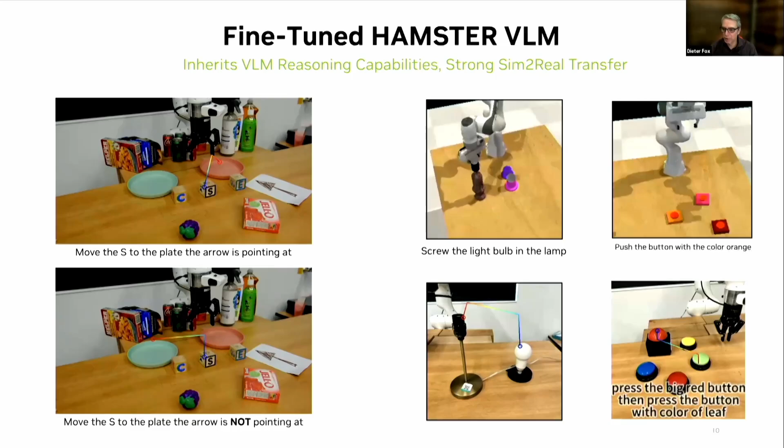Here, let me give you another example. There's the push button task, which is also only in the RL bench data set in simulation. And the model is able to correctly interpret this task here, where it has to identify which of the two red buttons is the big one.

And interestingly also, for example, in the training data, these buttons were only identified by colors like red, blue, and green, but it can transfer that even if, for example, the green button is identified through the color of leaf. So these are all kind of these transfers and generalizations that we're getting automatically by fine-tuning a very capable vision language model.

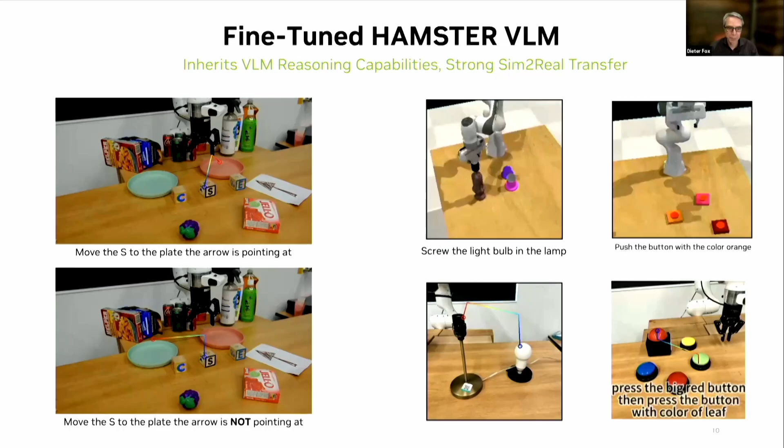So now that we have the high-level model trained, the next question is on the low-level model: how do we train the 3D policy? In this case, we actually tried out two different low-level policies: RVT2 and 3D diffuser actor. We could also use other diffusion policies, but these are the two we tried in the HAMSTER model here.

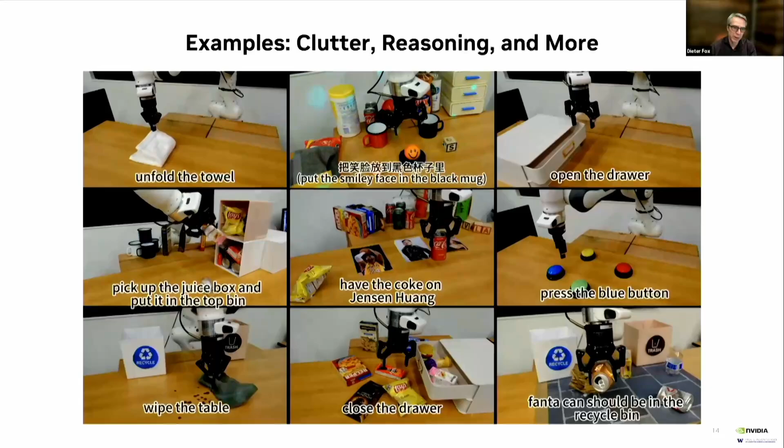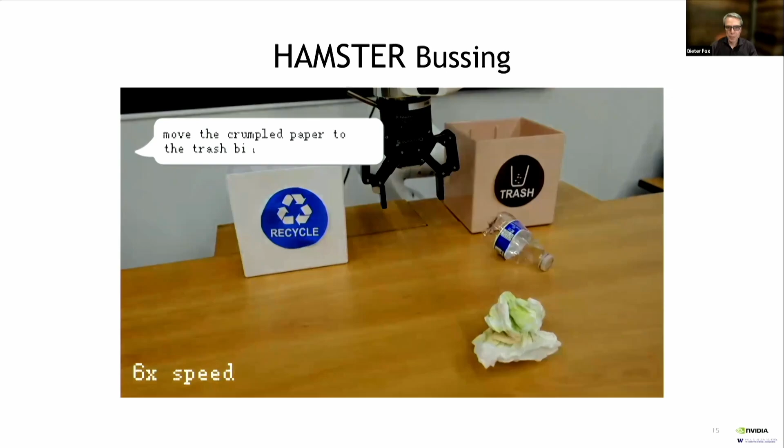Here's another very quick last example. We can also have a kind of conversation with the model, and then pick up a crushed can, put it somewhere, and we can do this kind of task with the trained model, leveraging both the semantic reasoning, open world power from the VLA, and also the 3D motion policies that we train. So with that, I want to summarize.

I think it's fair to say that these VLMs are becoming more and more powerful on open world reasoning, but also on fine-grained visual tasks. With just a little bit of fine-tuning on more manipulation relevant outputs, in this case 2D visual trajectories, we can generate VLAs that have very strong semantic and spatial understanding of manipulation tasks.

We're getting very good sim-to-real transfer at that level. But at the same time, these VLAs are not quite high frequency enough and not reactive enough to be deployed in robot manipulation settings. They're also not precise enough for the 3D motion that we need for robot manipulation, and for more higher dimensional dexterous manipulation tasks. That is where these hierarchical VLAs come in.

I think hierarchical VLAs leverage the capabilities both of the open world reasoning and reactive motion generation that you get from these lower level policies. Moving forward, I think the key open step is really on improving the lower level motion policies. These VLAs on the high level reasoning are already extremely powerful, and we're going to see more progress. But I think where we really have to move more is to train lower level policies on far more data, as we're seeing, for example, by Physical Intelligence and other companies, so that we get more robust 3D policies.

Clearly we've all understood that there's an explosion in interest and work going on in robotics today. Many years ago we just wanted to move from A to B. Now we're talking about generalist robots that will go into my home, your home, and perform interesting tasks. This growth is trailing a bit, but I think it's also inspired by the successes happening in AI broadly, but more specifically generative AI.

As you've heard today, we have amazing efforts in the community to collect data for training models. We've all understood it's different to train a model for a robot versus a language model. I'm referring to the Droid dataset, for example, the OpenX Embodiment. These are amazing efforts by the community to collect data.

Also, let me point out the use of simulation. Simulators are becoming much more powerful than they used to be, and they're closing the sim-to-real gap. I've also seen a lot of work on blending physical data collection and simulation. So it's very interesting what's going on.

And there are many new companies and research institutes working on this topic. I think we have to pay attention and understand the capabilities and limitations of this work. But definitely you'll agree with me that it's a lot of effort, a lot of compute, a lot of money, and a lot of time going into this effort.

So what I want to do is bring your attention to some other issues that I believe are very important for making progress and having robots capable of helping us and augmenting our capabilities. I want to talk about the power of having robust core operations. For me, a core operation is motion planning.

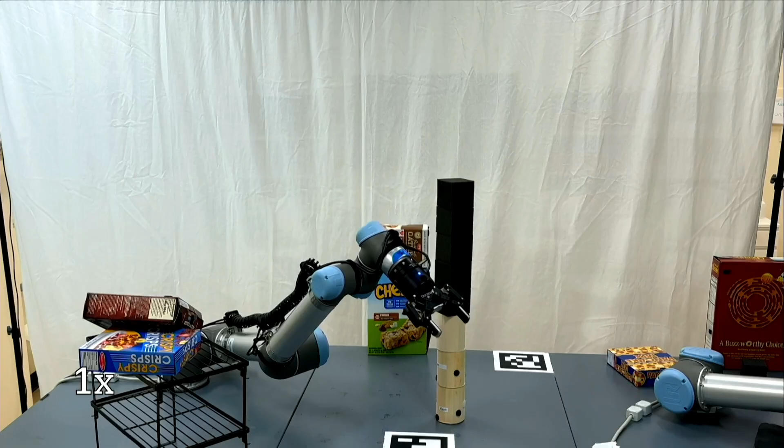So let's start with motion planning. Where are we today? In my lab, with some recent developments, we can do online motion planning for the robot you see here in a dynamic environment in milliseconds, on a commercial CPU, not a GPU. So we're providing this capability for a dynamic environment for any robot in any reasonable environment. Think about it, milliseconds.

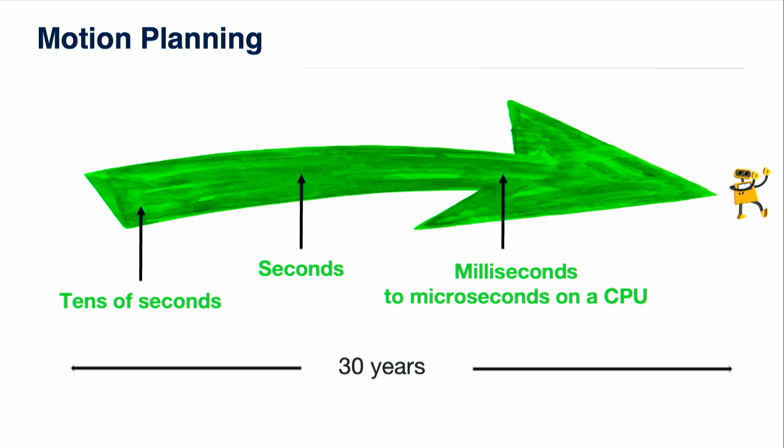This did not come immediately, okay? This is the result of work that's been going on for many, many years. We started with tens of seconds, and now we're down to milliseconds and microseconds, as I will show you.

The work I'm describing here is based on a technique called sampling-based motion planning. There are many sampling-based motion planners; this work started around 94, 96. I won't describe these planners here, but I'll say they sample the space somehow and create a structure, either a roadmap or a tree, that they use for motion planning. You can read one of the 200-plus papers that exist on different versions of these sampling-based motion planners.

Or you can use our OMPL, our Open Motion Planning Library. This is a library my group has been supporting for many, many years now. We have about 4,000 users, 40 planners, 81 contributors. This is really a resource for the community.

Last year, we showed how to take all these planners, the sampling-based motion planners, and have them work in microseconds in modeled environments. What is happening here is that we can use a kind of parallelization called single-instruction multiple data parallelism, and achieve kilohertz planning time speeds. SIMD allows us to unlock several algorithmic improvements in the core operations of sampling-based motion planners. These are forward kinematics and collision checking.

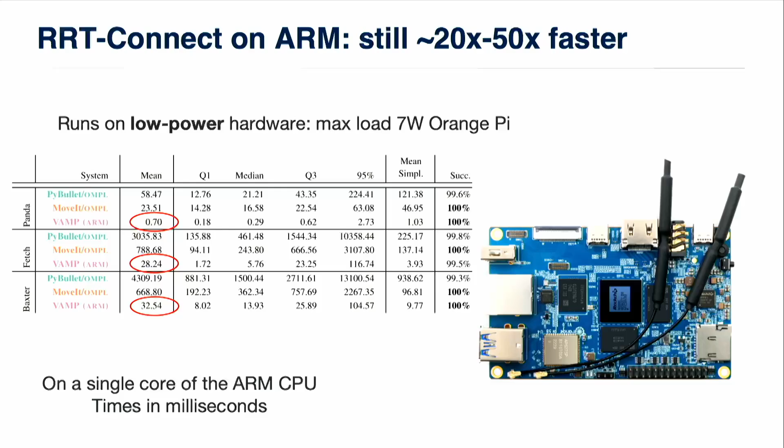Now, what happens with dynamic environments? We can achieve this planning time, it works, but you have to be careful how you implement things. What you are seeing here is a camera. We have a camera on top of this workspace, and you see the point cloud that we get from this camera. We receive a point cloud, we rebuild the scene representation, and we plan.

In order to do this, we have to use SIMD parallelism, and we had to invent new techniques and new data structures, in particular the collision-affording point trees. They allow us to do nanosecond collision checking, which enables us to plan in milliseconds in the environments that you see here. So this kind of operation is becoming very, very reliable and very, very fast and very, very cheap.

This is what I mean by paying attention to operations that we use all the time in robotics: make them really good and get them out of the way, try to understand how to put everything else together. And everything else, as you saw, is already a lot.

So the second thing that I want to talk about is the power of abstraction, modularity, and composition for long-horizon planning. This is something that is not discussed a lot recently, but in my opinion is very important. I'll show you an example.

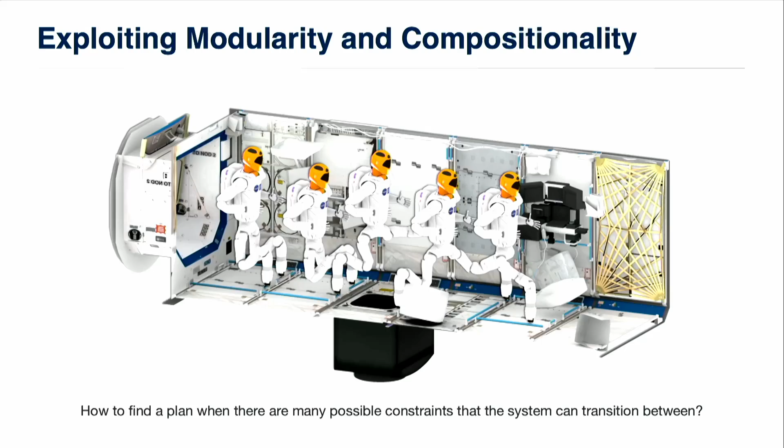I will use the R2 robot of NASA. This is a robot that NASA designed for the space station. It needs to go from one end of the capsule to the other end. It always needs to hold on a handrail, otherwise this robot will float in space, and this is not something that we want. So we plan under constraints, but we know how to plan under constraints, and we know how to do that fast and reliably.

So in this example, we plan on this constraint surface that I'm showing in the slide. This means that the robot has one leg tethered to a handrail. When this surface intersects with the pink surface, we know that two different constraints are satisfied on the intersection, and we can move from one constraint to the other, which means the robot can move to a new handrail and release the old one. And this is how we get the motion that you see here.

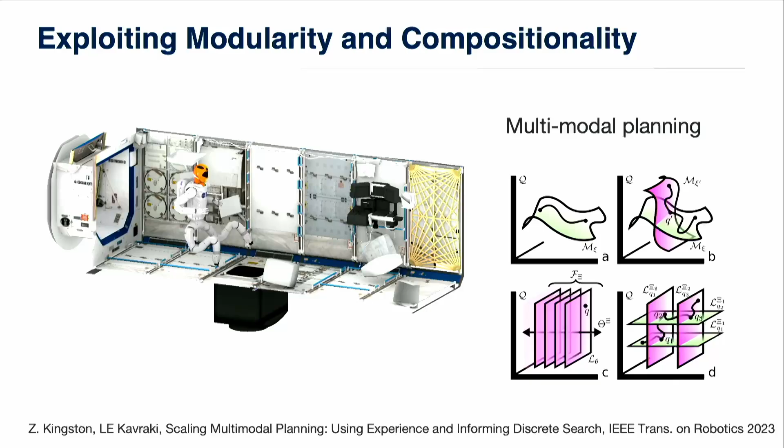There's no learning here, it's not complex, and this is the kind of behavior we are getting, and I can show you many examples. So this is compositionality of very, very simple operations, and it's done on the constraints.

There has been a huge amount of work on long horizon planning, task and motion planning. It did not start with LLMs or VLMs. It started a long time ago, in 1990.

Everybody since then has recognized that there are two very important parts when we talk about task and motion planning: one is the task planning, which is discrete, and the other is the motion planning, which is the continuous part. So we have a lot of things for each of these.

You've seen in the previous talk for task planning, we can use VLMs, LLMs, VLAs. It is, or formal methods, or constraint satisfaction. It's a lot of tools that we have at our disposal, and these tools are becoming better and better. It's amazing, actually, what we can do.

On the other hand, motion planning, I showed you we can have motions that can be computed very reliably, or we can learn skills. Machine learning has shown us how to learn difficult skills for the robot, skills that require some dexterity or have other characteristics that are hard to write down.

The question is, how do you put these two things together? And this is where everybody is stumbling. My opinion here is that you need to think about abstractions.

You have some task, okay, I'm talking about a long horizon task. You need some kind of representation of this task, some kind of diagram that has an abstraction of the task. You also need abstractions for the environment and the robot.

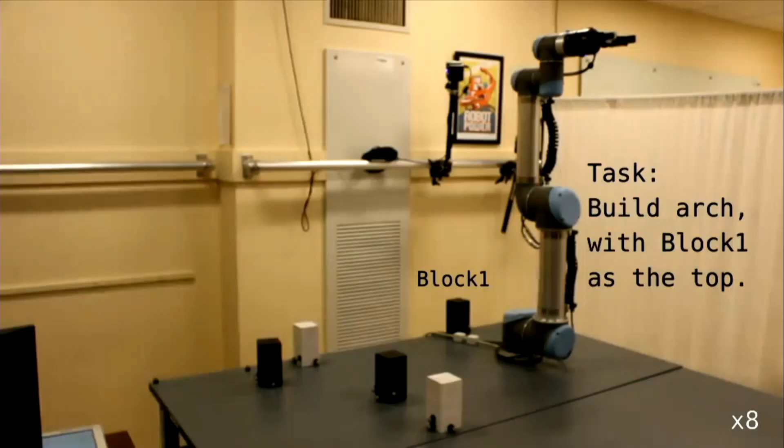Here's a video that I'm going to play, and look at the task. It's a very simple task: we want to build an arch. It has two black blocks as support, two white blocks as support, and it has a black block on the top. So here is the arch completed.

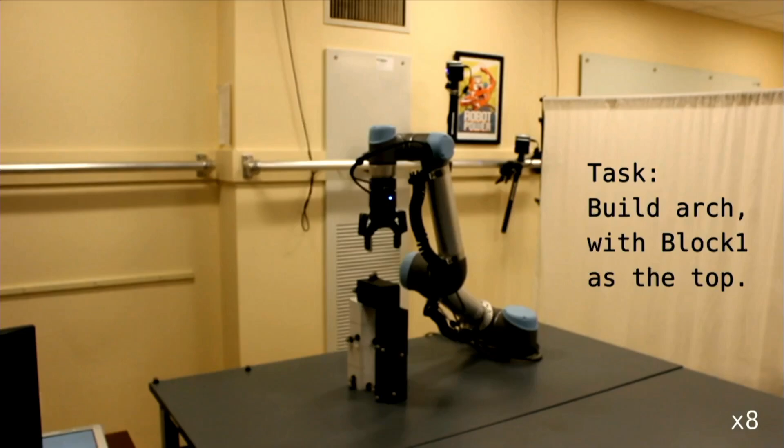What I'm going to do now is replay this video, and I want you to pay attention to the human, okay, not to the task. You will see that first the human...

Okay, let's hope this will start. First the human helps the task by correctly placing the black block. But here, it hurts the task by removing a block that was correctly placed. However, the robot needs to have a strategy, it needs to have enough information to complete the task.

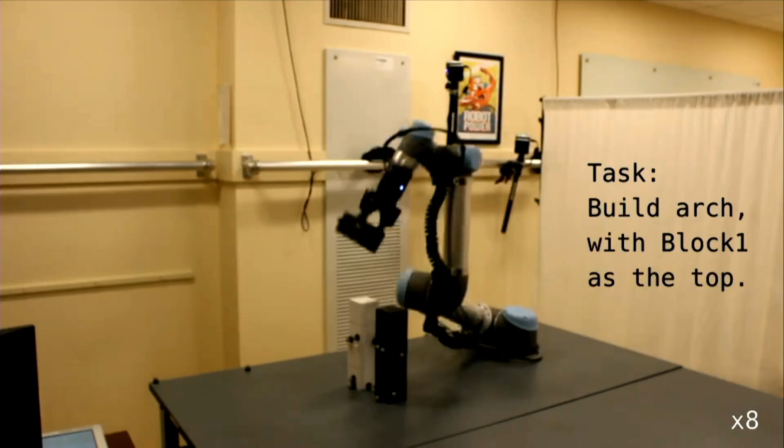And these are things that I believe are totally within our reach. But we need maybe to learn not the motions, but the reactivity of the robot. We can compute it with program synthesis, with constraint satisfactions. We have lots of tools for this. But maybe the human behavior...

How would you deal with an adversarial human? How would you deal with a helpful human? How do you put that in context of the task that you want to solve?

So I'm going to wrap up here by saying that I hope I conveyed to you my belief that we need robust and fast primitives in robotics, and we should continue working on these topics, either by learning or by traditional techniques.

And in the end, systems are both hardware and software, and they need to work together, and we need to display these capabilities for us to be credible.

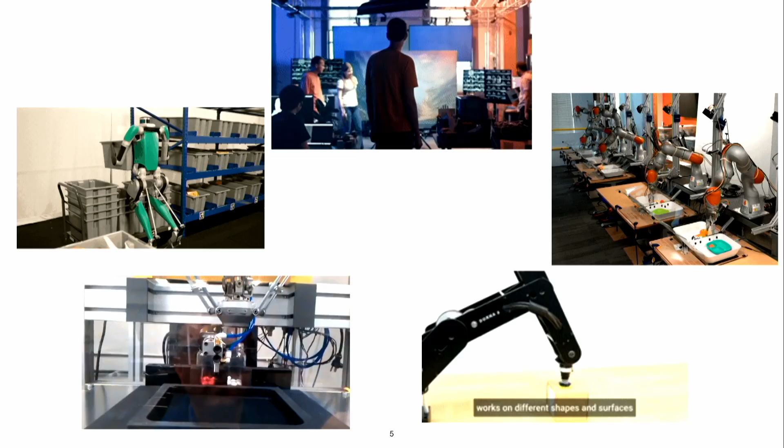So let's jump in. We've heard a lot today about robots that are operating in human spaces and how this would be extremely beneficial if we could actually have them in human spaces doing things that are useful. There's a huge market, a huge need for this. My lab looks at this very holistically. We want robots that can actually assist people. Today I'm going to focus really on the dexterous tasks that you really need for these systems to be effective in human-based environments. So there's been a lot of really cool work over the past few years and decades.

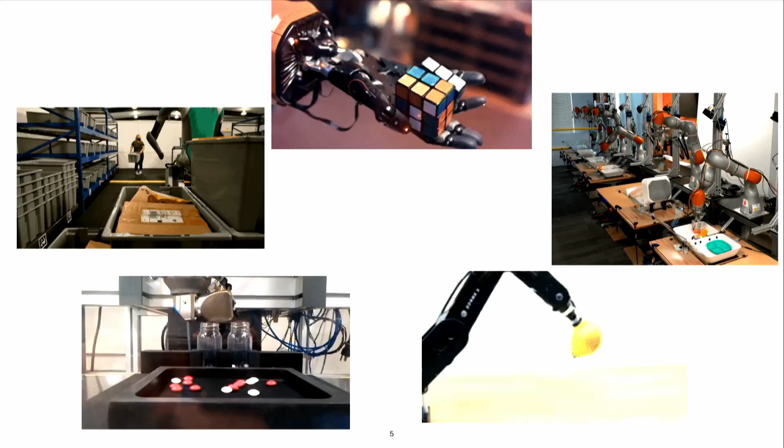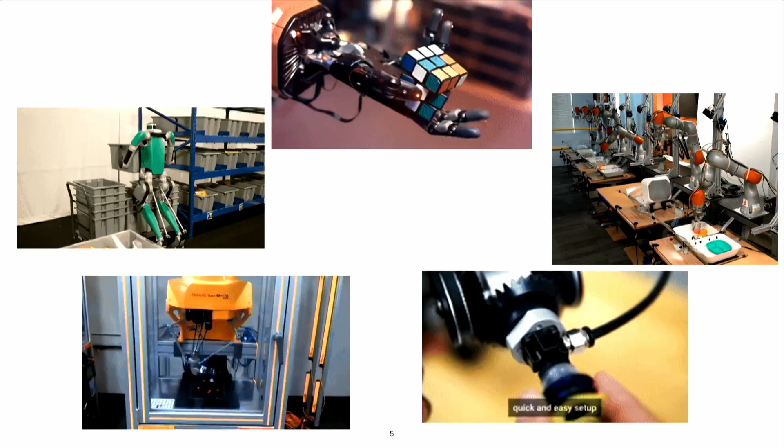But I think one of the key catalyst challenges is having robots that can actually manipulate their environment effectively. In our previous panel, we heard about the Roomba doing amazing things in the home, and then we really had this challenge, and I think it was Charlie that said, if you had a robot that could actually do manipulation, then you have that huge value for those things that you could do in the home. And the question becomes, we have manipulation, but is it good enough, right? We see a lot of these companies that come out and they use a lot of data, they can actually do a lot of cool things, but perhaps some things that we kind of take for granted, like if we want to button up our shirt, is still extremely out of the domain of robots right now.

And why is that? So if I look at some of these videos that I just showed you here, there was challenges and lack of hand articulation. Maybe there's external cameras that need to be involved. Simple pick and place tasks are good, but if there's really dexterity that's required, this is still a really big challenge. And then suction cup is used on the industrial scale, but if whatever you're working with is not flat, hard, rigid, if it's soft and these other issues, you might have trouble.

And also, how long does it take to teach these robots to do these things? If I think about teaching a person how to do these tasks, if they watch me and they feel these things, they're able to pick up really quickly. So why can't we close that gap for robotics?

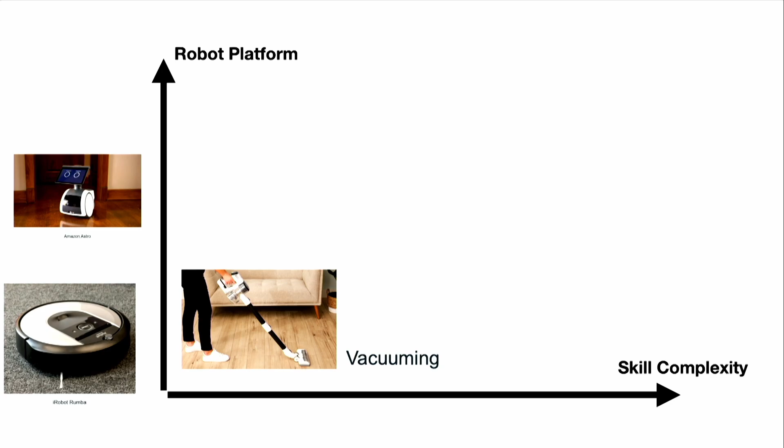And if we think about the robots that we want working around us, the things we need them to do, the Roomba is a great example. You have the vacuuming. You have these social robots that are able to provide communication, home security. But what are we really looking for? I would argue we all recognize, and hence all of the humanoid robots that are coming into existence. If you had a robot that could do all of your chores, could look after an elderly relative, this would be the holy grail.

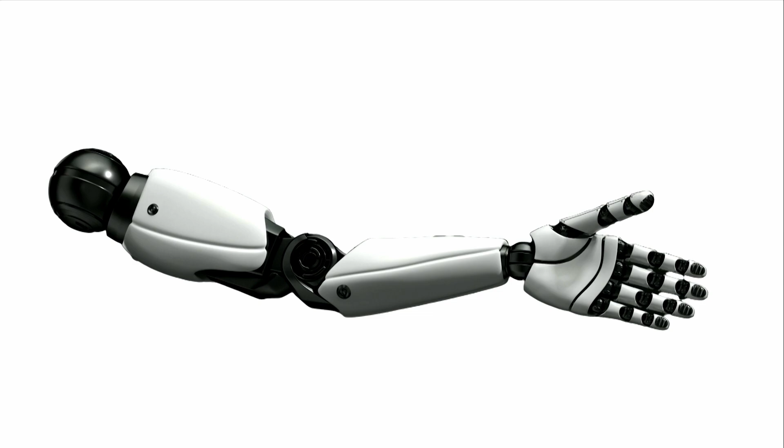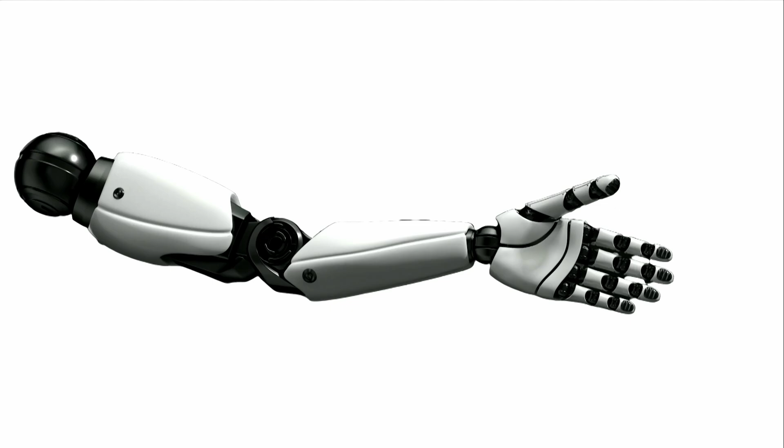So I'm going to jump into quite a few cutting-edge projects that we're doing in the lab. Some of them are published, some will be coming out this month, and really just trying to address this whole problem of manipulation holistically. And so I'll just quickly throw up all my students who work on all of these aspects of the arm and get into what each one of those components include.

So one is the sense of touch. We need robots with a sense of touch that's comparable to what humans can do. If humans are going to teach robots how to do this task, if the robot can feel what the human feels, then you have the opportunity with that data to actually make the same conclusions the human would make with that information.

So I'll talk about our novel optical tactile sensor, DenseTact. I'll talk about induction tactile sensing, which is a new tool we're using in our lab that we think will lend itself to getting more efficient data from a person while still allowing them to have the sense of touch they need to perform a task.

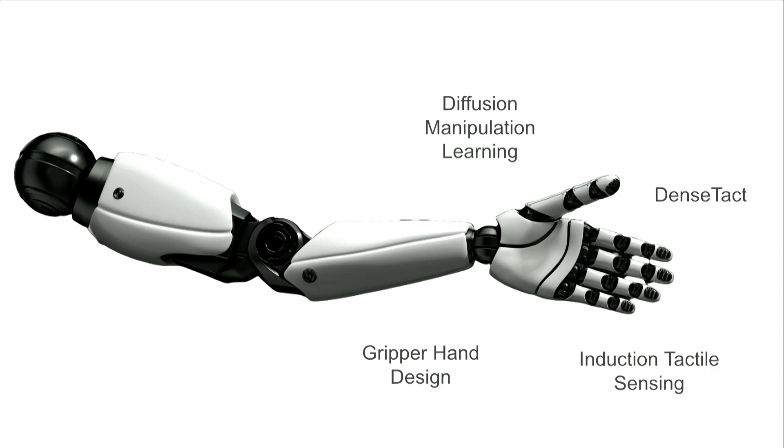I'll talk quickly about our work in gripper hand design, how we can plan for how the hands should move using diffusion. I'll mention some upcoming work in JParse, where we figured out how we could move into and out of singularities with asymptotic stability. This is not damped least squares. This actually gets you to the point, and it helps solve an embodiment problem.

If you want to watch a human demonstrator, you can truly follow their wrist location, their finger location, and I'll show you a video of that. It's a really cool paper coming out shortly. And then I'll talk a little bit about our work applied to teleoperation. Let's go.

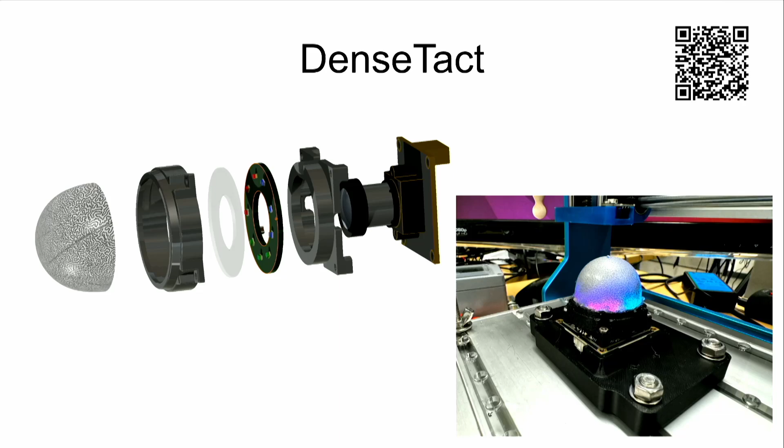So, starting with design, DenseTact is an optical tactile sensor. You have a camera that looks through a translucent silicone gel. It's illuminated by LEDs. When you deform that extremely soft gel, you can actually see the shape and forces of the objects that you're touching.

We use machine learning to take that image and output the shape and net force for that sensor. Right now, our version of our sensor is able to provide you a 6-axis wrench. We're going for a full stress field within the next month.

Here's how we calibrate it. We push it into known indenters. Because we're so soft, we need to know where every position on the sensor is at once. With that information, we can obtain the shape. And in this video, this is how we obtain the forces. We have a net wrench sensor, an ATI sensor below that gets the force and correlates that to the image in our model.

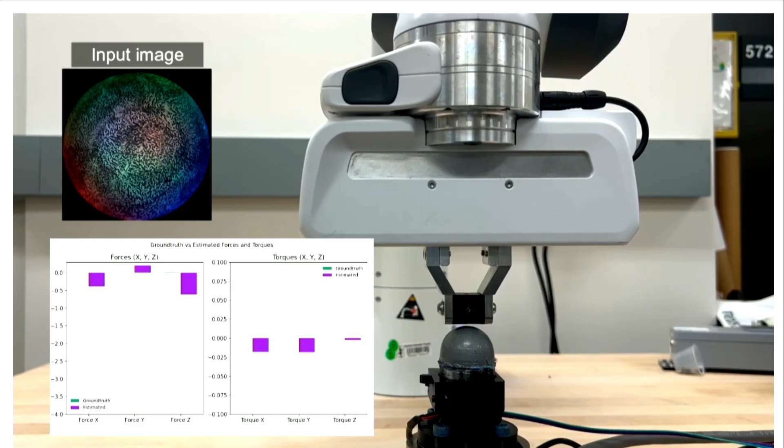This video shows both the ability to detect the 6-axis wrench. The ground truth is shown in green, our sensor measurement in purple. Same model, same setup. We can then use it to collect the high resolution calibrated shape, where for every pixel we have on the order of 0.3 millimeter accuracy per pixel on a megapixel image.

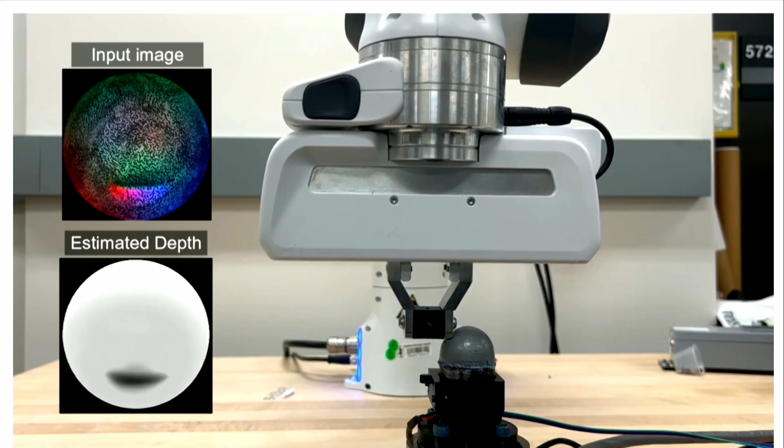What's next? We want to be able to take this information and say, not only can we get high resolution calibrated shape, but what if I could give you the stress field as well at that same resolution and calibrated? If you imagine a person tying a knot, they might need to pull on the different strings and figure out which strings have tension, which ones are loose, and that's how they can actually do that when there's occlusion from vision. Robots could potentially do this too with our type of sensor.

And so this is the high-level method we use to accomplish this. We say, well, we can build a version of our sensor in Abaqus, we can perform these stress measurements, and then we can bring this over with transfer learning to the real world so that we can actually have a calibrated, high-resolution 3D 6-axis wrench sensor over the surface of our sensor in addition to the calibrated shape.

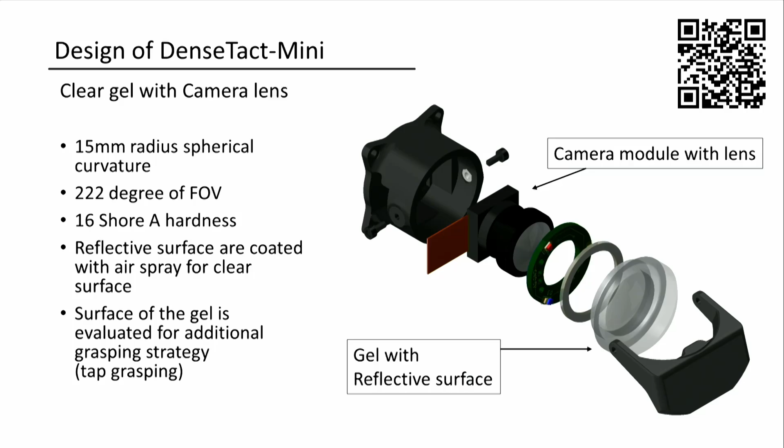We're working to miniaturize this because we're already thinking ahead of what it means for industry to adopt these sensors. If they're too expensive for every finger, that might make adoption more difficult. So we're working to get a version that's under $30, and soon, hopefully, even under $10 per finger.

This is what our current latest DenseTact-Mini looks like. So here you can see our whole sensor. This one is under $40, and most of the cost here is actually in the camera. For a cheaper camera, you can just bring this down.

And so what can you do with this type of sensor? One is a task that is really challenging for vision. What if you wanted to reach into a bowl of screws, figure out which screw you're holding, and classify it?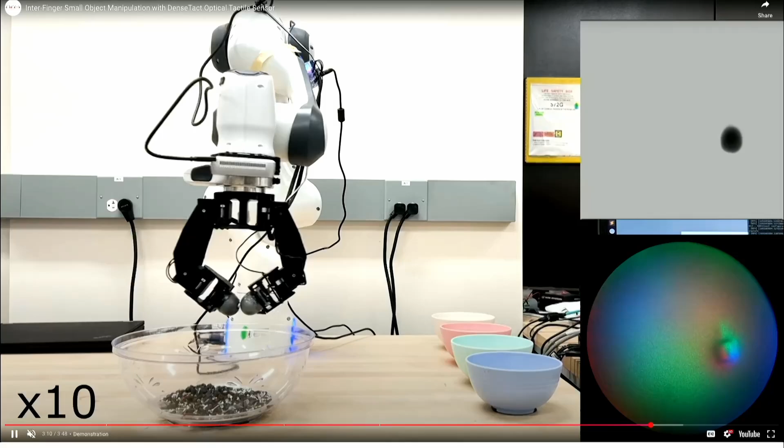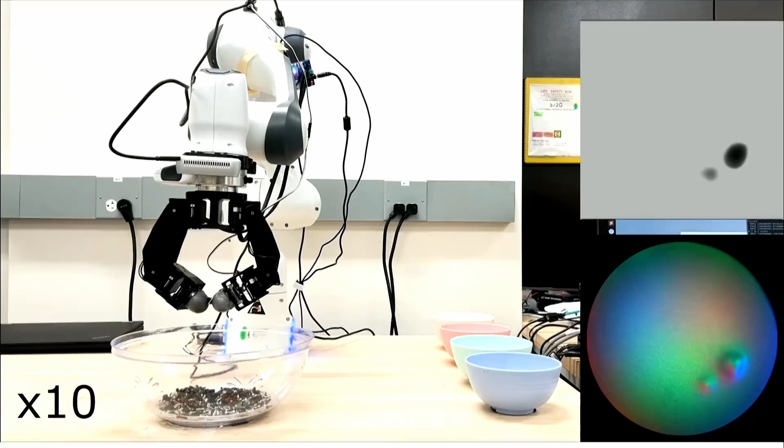If you did this at Home Depot, you'd probably quit your job really quickly. Our robot can do this and save you a lot of pain and suffering. Here you can see the robot reaching in, able to pick, sort, squeeze, and feel which screw is between its finger. If you try this with most other optical tactile sensors, you might struggle to actually feel the shape because they're too rigid. DenseTact being soft can actually deform around the screw and give you that better classification.

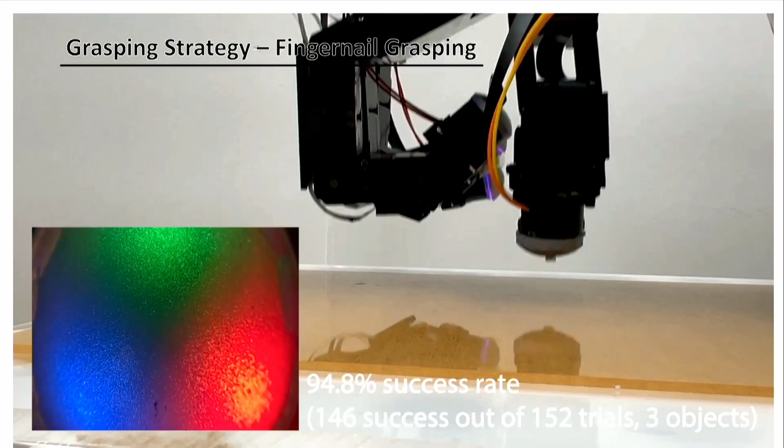For the DenseTact Mini, we realized you could do things like tap grasping. If a person goes to pick up something that's really small, they actually use electrostatic forces to adhere to the object they're working with. We were able to replicate that. We gave ourselves a rudimentary fingernail and could also pick up extremely flat objects, and we're working to integrate that into a more final design. These have great statistical performance in picking these things up successfully.

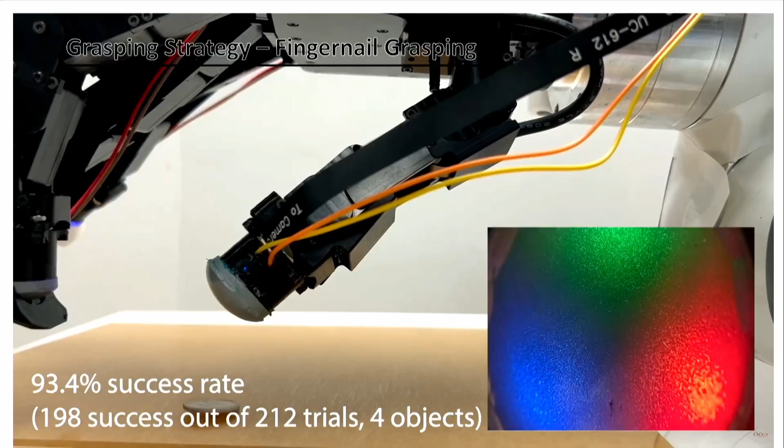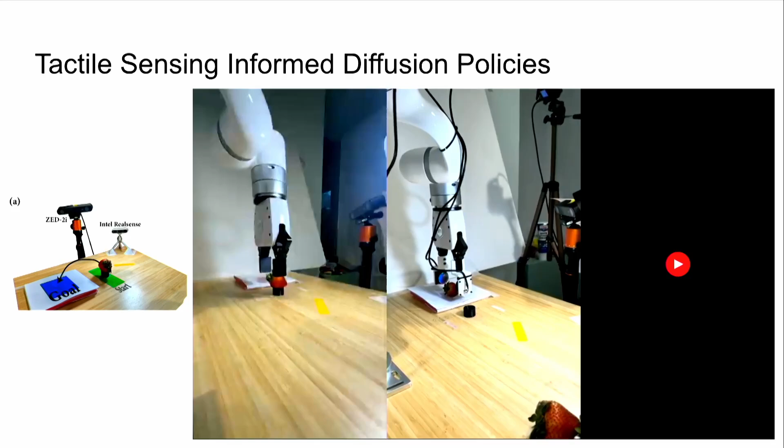Moving to a more practical use case, you can imagine wanting to use these types of grippers in agriculture. So two questions: could you use the sense of touch to determine if you're squeezing too hard? And if you wanted to assess whether or not you were damaging the fruit, how would you effectively do that? To accomplish that, we use DenseTact on our finger and compare this to the damage that would be caused by not using a DenseTact sensor. We're actually able to show that using DenseTact in a diffusion policy, we're able to pick up soft fruits with precision and care.

And how do we assess that damage? We actually use neural radiance fields. We can take a Gaussian splat and scan a strawberry and use this to label areas of damage, which is perhaps a very nice emerging metric for fruit quality observation.

Another use case might be using this to pick up very soft things, like I mentioned before. So what if you wanted to pick up a cloth and figure out how many layers of cloth were between your fingers? You could rub your fingers together and use that friction information to tell you how many layers you were holding, and it turns out this is a very effective method.

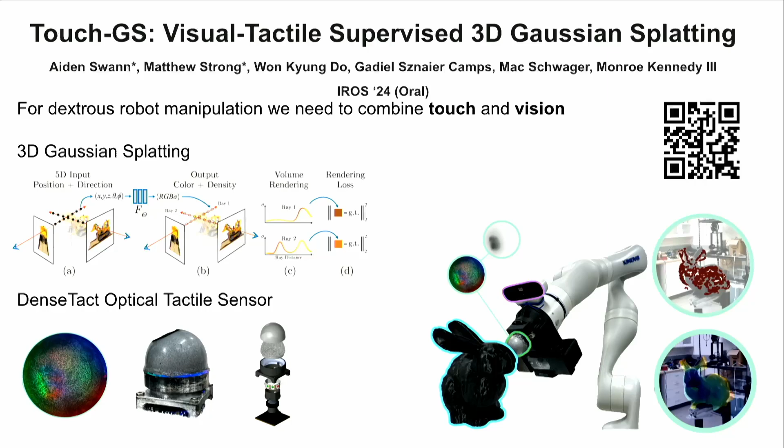What if you wanted to explore an object that might be very dark, transparent, or reflective? You can use the sense of touch combined with vision, so as you touch, you actually build a model of the object you're interacting with. By touching this object many times, we can build a Gaussian splat, a statistical reference of where the surface is, combine this with vision, and this allows us to build hyper-realistic views of the objects we're looking at. Here is a Gaussian splat combining both touch and vision. If you just use vision, you have issues with the object being too dark, or the surface being reflective or transparent, but with the sense of touch added in, you're able to see these surfaces quite well.

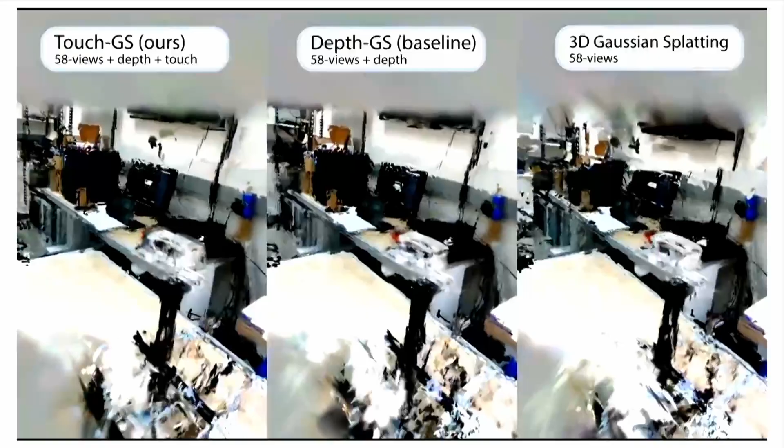So another question you might ask is, if you're going to sense with this advanced sensing, what's the most efficient way to do this? We actually use next-best-sense, which says if I can touch or look at the object efficiently, I can determine what the next best position should be in order to effectively build a map of this object in real time.

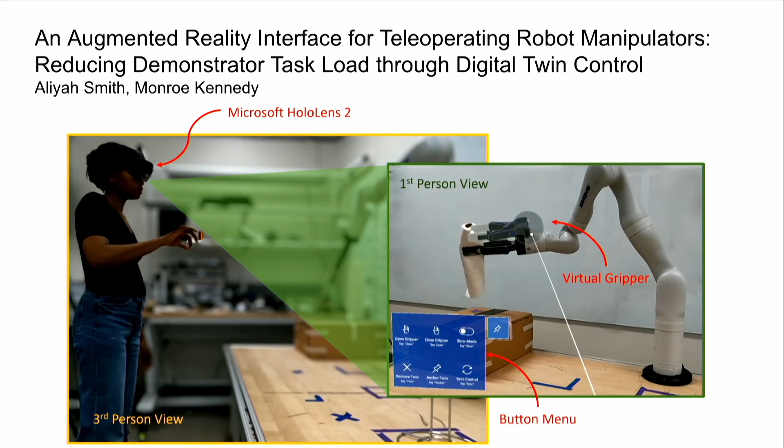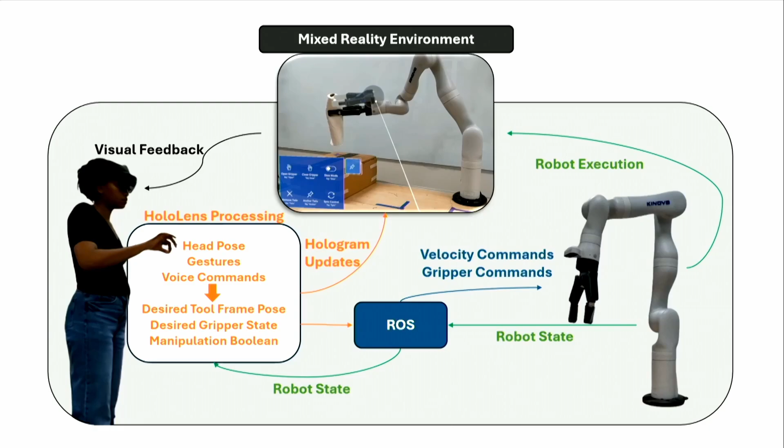So shifting gears, we talked about the sense of touch. What if I want to correlate this with what a human wants to do? I want to drive the system—what tools could I use for that? In my work done by Aliyah Smith, she's using a HoloLens to view an arena and using those interfaces to drive the actions of the robot in a very intuitive manner. Here she's able to pick and perform teleoperation using a digital twin of the robot to drive and perform these manipulation tasks.

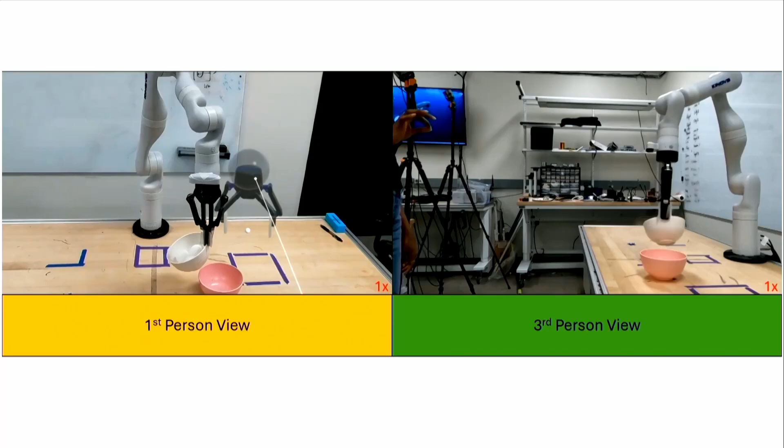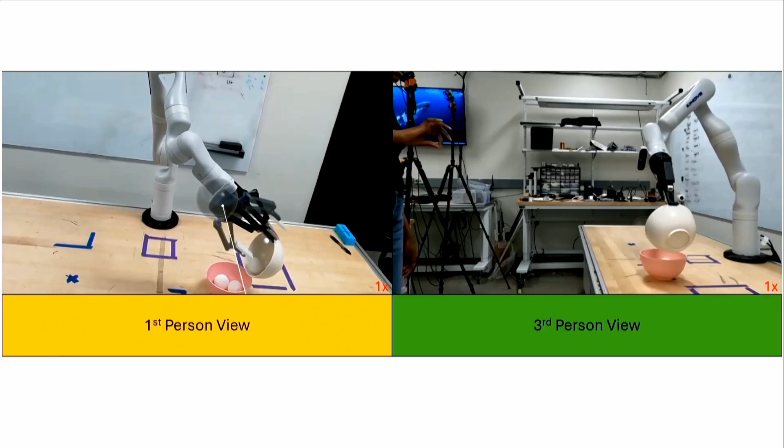This becomes really interesting if it's hard to work with a robot at scale. Maybe your robot's really big, maybe it's in a dangerous environment, maybe there's a biohazard. How could you use these systems to have a very intuitive way to work with a manipulator, to control its desired motion?

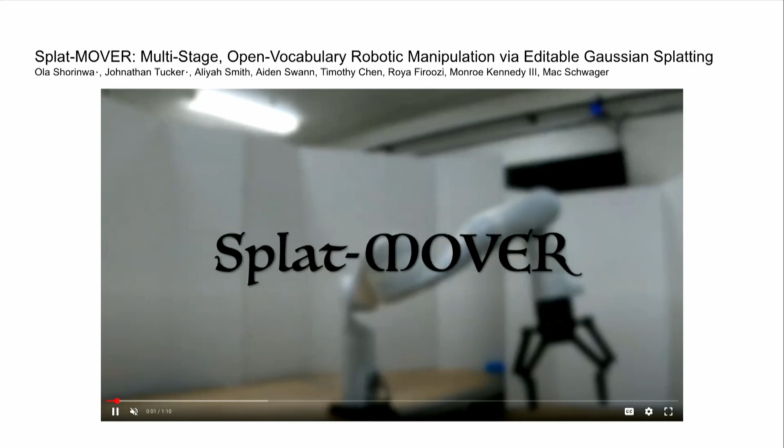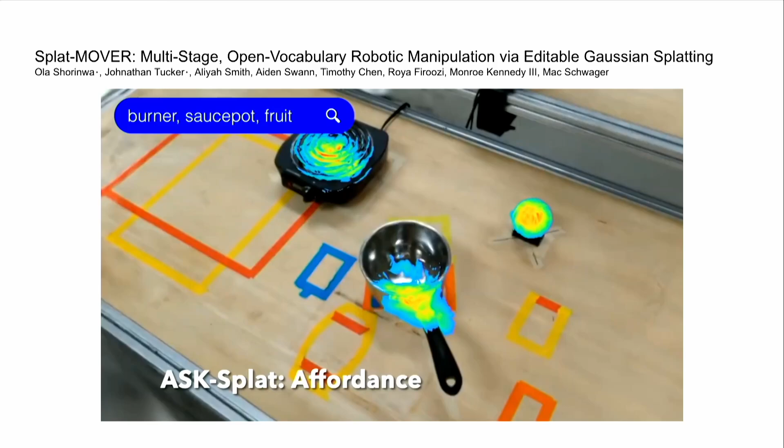You saw a little bit of this in one of our previous talks. I think Dieter was mentioning this, but language is really emerging as a very powerful tool with VLMs to give these systems contextual understanding of what they're doing. Here we're embodying language into a Gaussian splat with affordances of the objects we're looking at, so we can say, hey, if I want you to put the pot on the stove and put the fruit in the pot, could you achieve this efficiently?

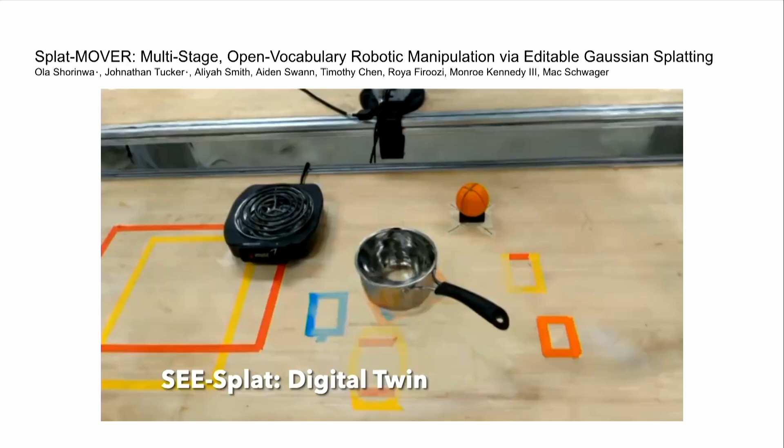In the interest of time, I won't play this all the way out, but you can see how we can edit our Gaussian splat with that hallucination of what the person asked to be done, so move the pot to the location, and then with that plan, we can execute this with the physical robot.

Moving to the notion of arm control, even in the last talk we mentioned how you can use sample-based planners to plan motions, but oftentimes those give you really weird, unintuitive motions. The alternative is to use things like a Jacobian pseudo-inverse. That works well if you're in a high-rank pose of the arm, but the moment you move near a singularity of the Jacobian, it locks up or creates a high velocity and you risk damaging your robot or breaking something.

Damped least squares is a way to try to work around that, but it introduces errors so that if you want to reach a desired pose, you'll never really be at the position you commanded. So we address this with a new tool we call J-PARSE.

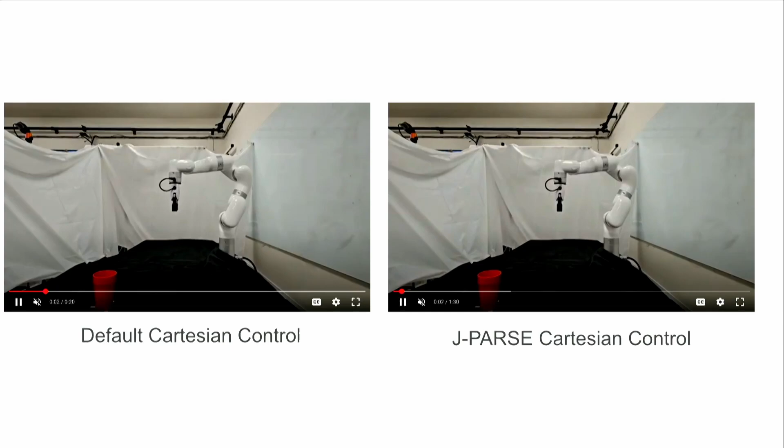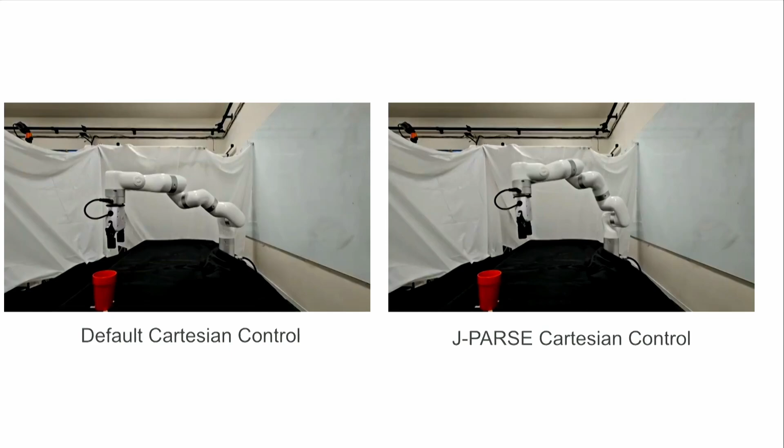I'll show you two anecdotal videos here. The one on the left is a default xArm position controller of the end effector trying to reach out and grab this cup. On the right, I'm using our method J-PARSE. You'll see, right there, the default Cartesian controller just stops immediately. And what you're seeing on the right is a closed form controller that goes all the way to the singularity with accuracy to perform a grasping action.

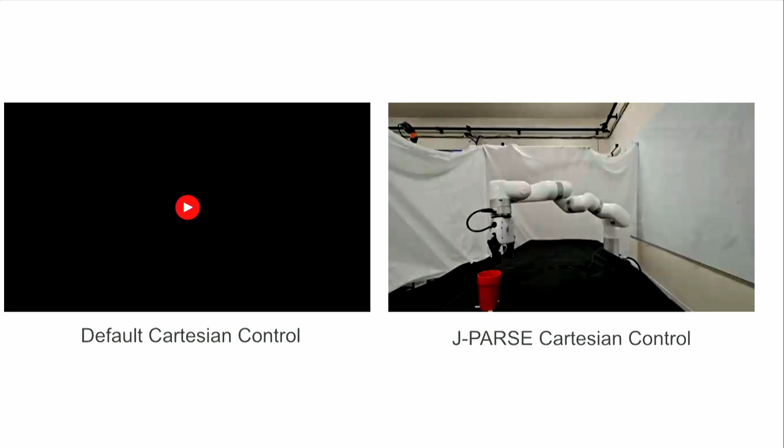This will be useful not only in controlling arms, but also if we want to think about embodiment for fingertips. I can say, where should my fingertips be? Even if your links are different than mine, our robot bodies don't have to exactly match a human's body to learn. We can just say, where do we want the end effectors to be, and use this for both arm and hand control.

So what's next? We want to keep adding all of the sensor modalities to sensors like DenseTact. What happens about vibration or temperature? How can we actually incorporate these into our sense of touch effectively?

And if we want to do all the tasks that really matter, let's stop doing gimmicks and go for the really hard stuff that actually has market value. What does it mean to be able to do all of these things successfully? Part of that is having capable systems and using all of the latest tools to know how we should effectively move our system to accomplish goals. Some of the goals worth trying are what it means for a robot to tie a knot when the string is pretty small, or zip up a zipper, or handle a tool with precision. I think if we can do these, we'll see a really meaningful market value for humanoids and all types of manipulators in human spaces.

I'll end with this. How do we teach these systems? I think learning from demonstration, imitation learning, is a very powerful tool. Humans are fantastic instructors, right? We know how to do all the tasks we want our robots to do.

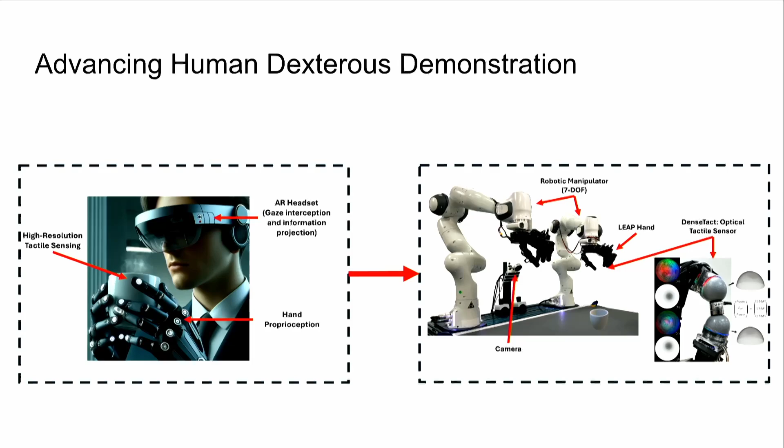So if you could put onto a person a pair of glasses so that we could see what they're looking at, if I could have you wear gloves so I know how your hands are moving, and if I could give you sensors on your finger that intercept your sense of touch without inhibiting you from feeling what you need to feel to do the task—if I could get all of that and replicate those abilities on the robot, then I think we would have very successful and quick learning with these types of systems.